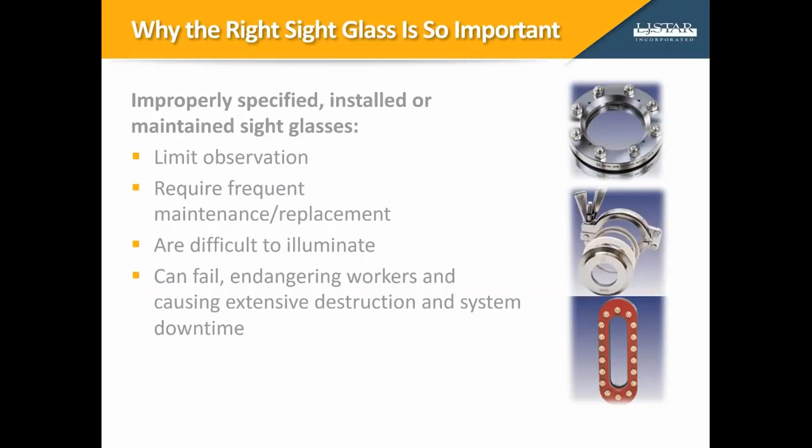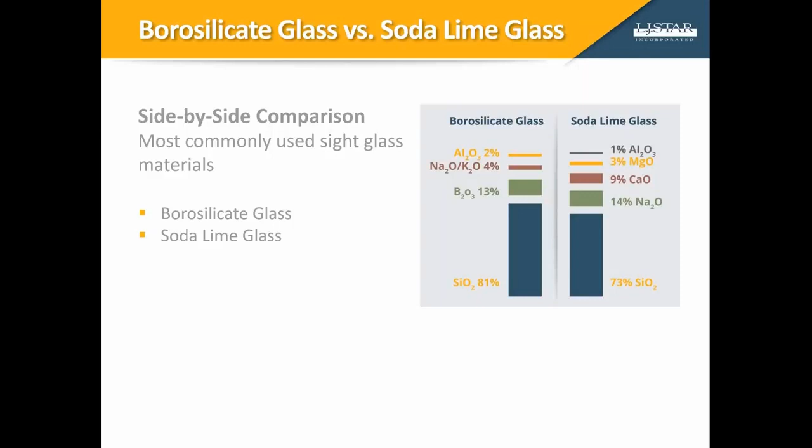Before the development of borosilicate glass, almost all sight glasses were made of soda lime glass, a common, relatively inexpensive glass which is used in bottles, light bulbs, and window panes. This glass is typically made from silica, soda, lime, magnesia, and alumina. Soda lime glass is widely used for low pressure, low temperature, and non-caustic sight glass applications.

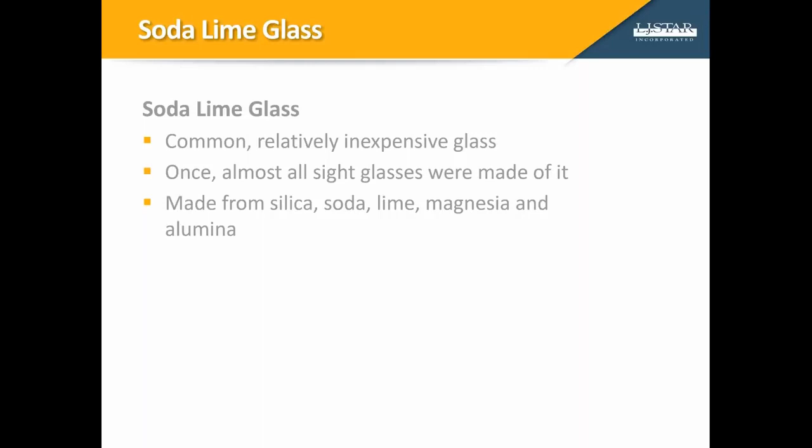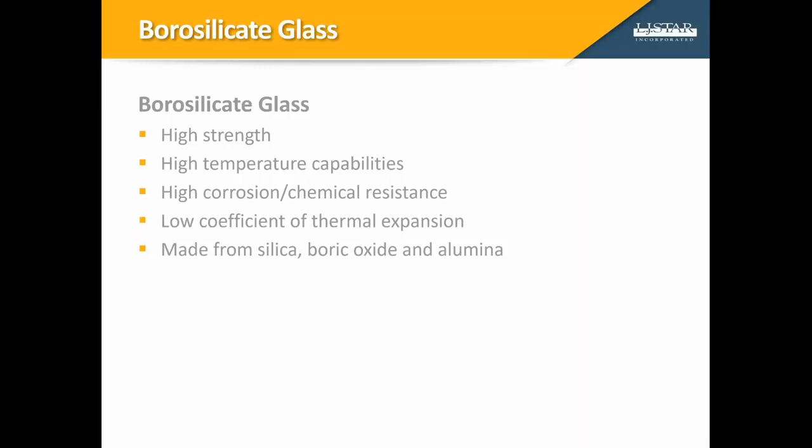Borosilicate glass, which was originally developed by Corning under the brand name Pyrex, offers high strength, the ability to withstand temperatures, high corrosion and chemical resistance, and high thermal shock resistance. In addition to sight glasses, borosilicate glass is used in cookware, lab equipment, and glass pipe. It's made from silica, boric oxide, and alumina. The boric oxide enhances its stability and helps to bind the rest of the elements together to prevent leaching.

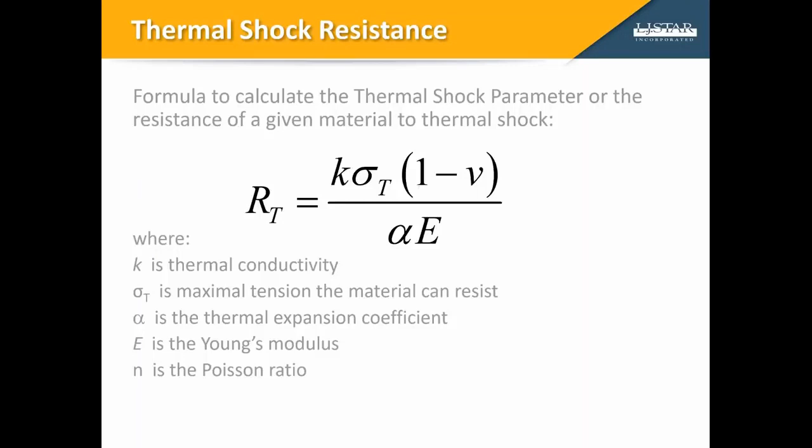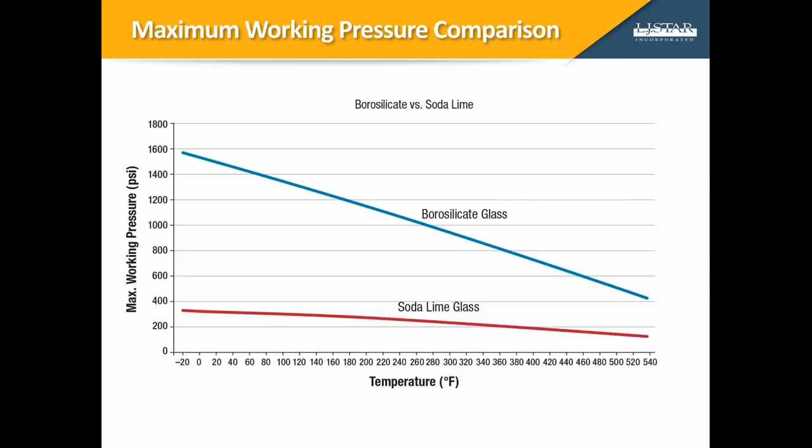The glass material selected, the unsupported diameter, and the glass thickness all play a role in determining the pressure capabilities of a sight glass assembly. This graph illustrates how borosilicate and soda lime glass perform at various working pressures and temperatures. Note the higher working pressure capabilities as the temperature increases for borosilicate glass compared to soda lime.

Borosilicate glass offers much higher chemical resistance than soda lime glass, which is important to prevent the breakdown byproducts of the glass from being introduced into the manufacturing product. Glass is not chemically inert, and even water can degrade its surface over time. Chemical degradation from caustic or acidic substances or pitting from mild abrasion can dangerously weaken glass, obscure its transparency, and create crevices where bacteria can hide or leach into the processed media.

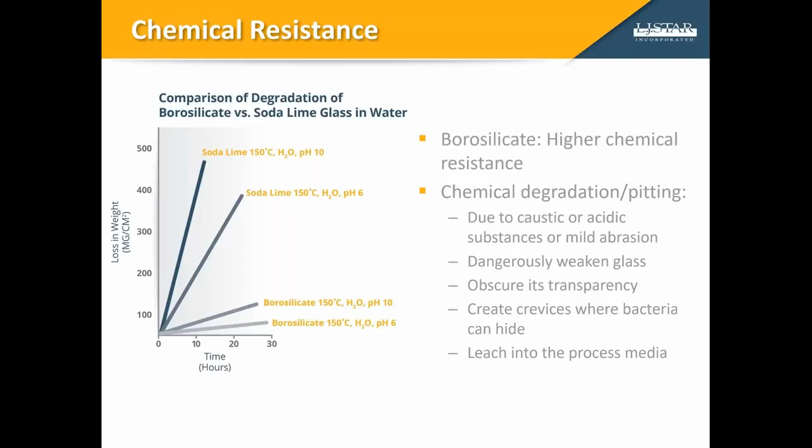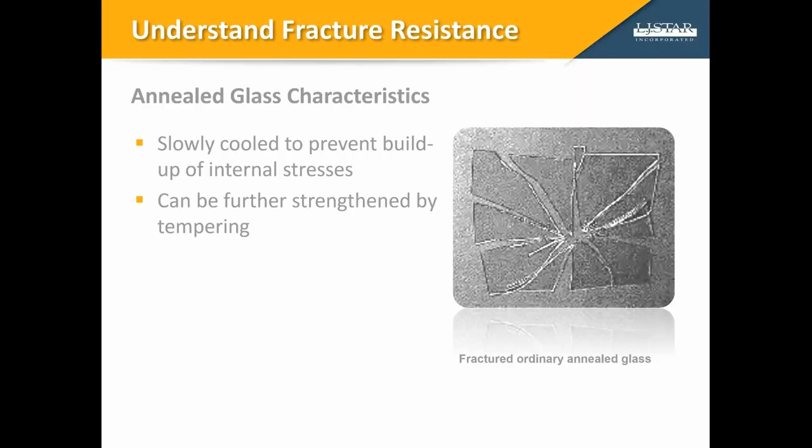Annealed glass has been slowly cooled to prevent buildup of internal stresses, so it can be cut and further processed. After annealing, the glass can be further strengthened by tempering. There are two methods to temper glass. In the first one, chemical strengthening, a chemical solution is applied to boost the mechanical resistance of the glass.

In the second method, thermal tempering, annealed glass is heated to approximately 680 degrees centigrade, almost its softening point. The glass is then quenched or cooled with a steady high-pressure flow of compressed air. This process quickly cools the surface, which goes into compression while the core is allowed to cool more slowly, which then goes into tension. This process makes heat-tempered glass 3 to 5 times as strong as annealed glass.

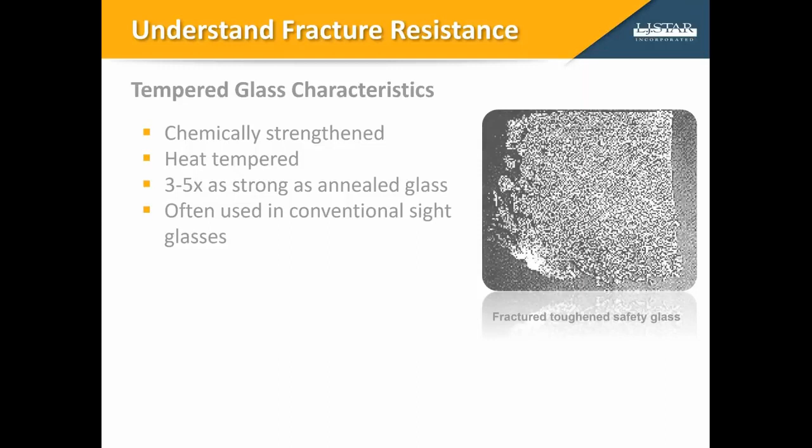Rapidly cooled, fully tempered glass, when fractured, releases the tensile energy stored in the core and breaks into many fragments, much like automotive glass and glass basketball backboards. If, instead of cooling the glass rapidly, it is allowed to cool slowly, it becomes only twice as strong as annealed glass. When fractured, these broken glass fragments are linear and will normally remain in the frame. Thermally tempered glass is often used in conventional sight glasses.

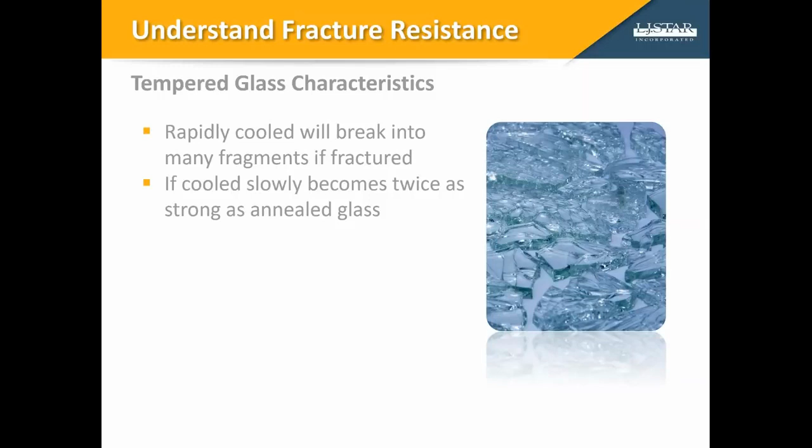In addition to tempering, glass can also be strengthened by placing it in mechanical compression. Fused glass sight glass windows, like Metaglas, offer high pressure capabilities and high safety margins. The strongest type of fused glass sight glass windows are made from duplex stainless steel and borosilicate glass. This combination creates the highest compression.

During heating, the glass is melted within the metal ring as the ring expands. The glass and the metal ring fuse together. When the unit cools, the glass hardens before the metal ring shrinks back to its original size. This process places the metal ring in tension and the glass in uniform radial compression. Glass can tolerate very high levels of compression.

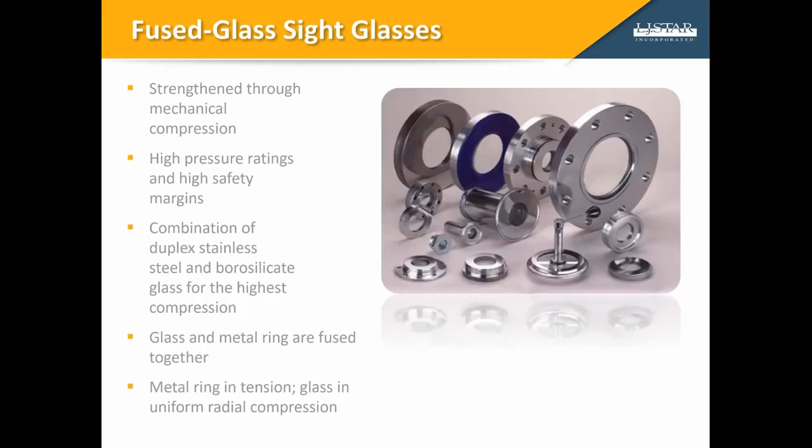Radial compression improves the performance of the glass because it offsets the effects of tensile stress. Under this strong compressive force, the glass, in effect, becomes elastic. The metal ring enhances failure resistance because mounting and sealing pressures are applied to it rather than the glass.

Even when bending forces extend beyond the metal ring into the glass, it remains elastic and able to tolerate bending. Fused glass sight glasses won't shatter even under extreme bending force. They can fail safely because they retain elasticity.

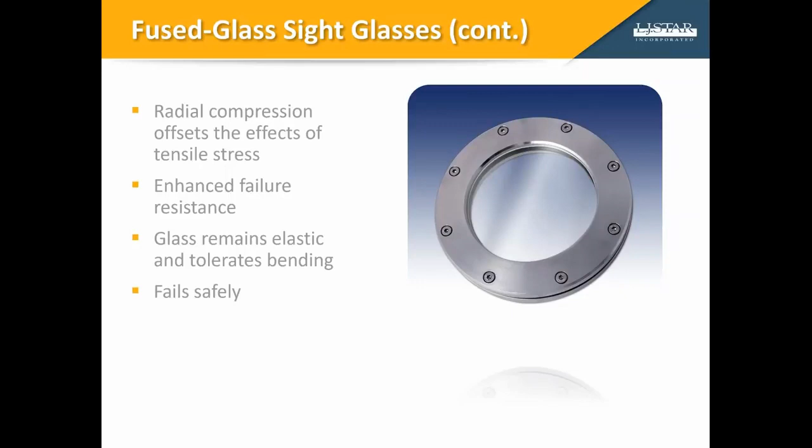Any number of factors can contribute to a sight glass failure like the one you see here. A sight glass failure can be attributed to improper assembly design, such as flanges that are too thin, too few bolts, a cushion gasket that is too soft or too thick, or inadequate glass thickness. There's also the potential for improper installation, such as over-tightening, uneven torquing, or debris trapped between the vessel and the sight glass.

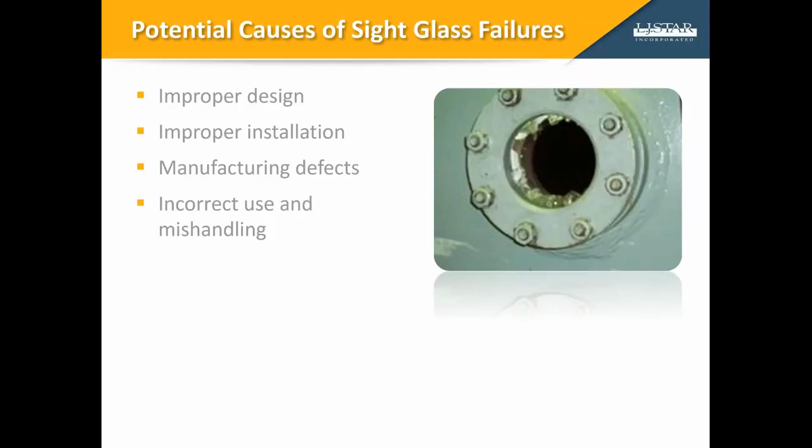Manufacturing defects, such as flanges or glass that don't have flat and parallel surfaces, can lead to failures. Incorrect use and mishandling that introduces microscopic surface defects can also require premature replacement.

Reusing commercial conventional glass discs and gaskets during maintenance and inspection can also create an unsafe situation. Both glass discs and gaskets should be replaced every time.

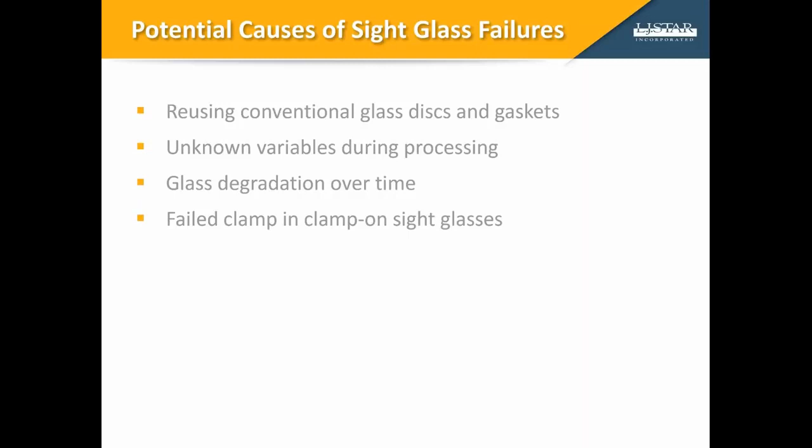Finally, for clamp-on sight glasses, which are widely used in the pharmaceutical and food production industries because they allow all components to be disassembled for easy cleaning or reconfiguration, the wrong clamp can lead to big problems. Always choose clamps designed to withstand the level of pressure the sight glass will experience.

This formula will allow us to calculate how thick your sight glass window should be based on the pressure differential it will encounter. Generally, the thicker the glass, the higher the pressure it can withstand, and the lower the resultant overall stress.

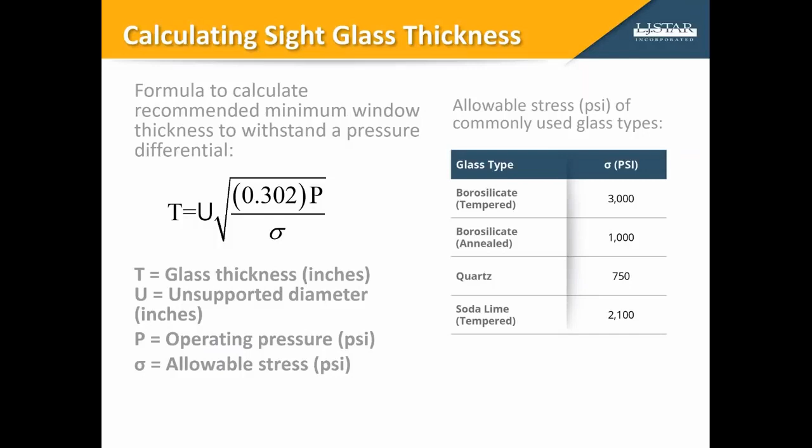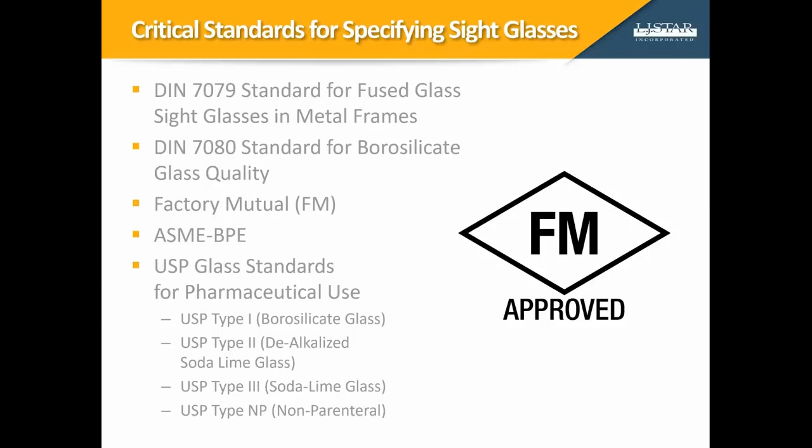Here's an overview of the technical specifications associated with the DIN 7080 spec from 2005. With this specification, there's an allowable continuous working temperature of less than 536 degrees Fahrenheit, and the maximum allowable working temperature is less than 572 degrees Fahrenheit. Keep in mind that when working temperature is greater than 536 degrees, the glass must be protected with mica film and replaced after 300 hours.

The thermal shock resistance, ISO 718, is 446 degrees Fahrenheit. Hydrolytic resistance, ISO 719, is class HGB1. Borosilicate glass has a very high hydrolytic resistance due to its composition, which contains significant amounts of boric oxide. This test classifies glass resistance to chemical attack by heating the glass in contact with water.

The acid resistance, according to ISO 1776, and the alkaline resistance, according to ISO 695, is shown in the slide, along with the linear thermal coefficient of expansion.

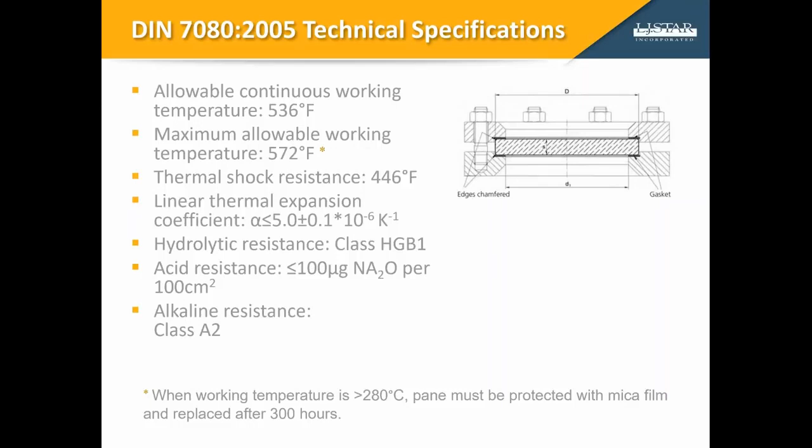The 2005 standard applies to pressure-resistant circular panes of glass made of thermally toughened borosilicate glass, which are designed to withstand a continuous one-side fluid pressure at temperature up to 536 degrees. The standard does not apply restrictions to the use of borosilicate glass panes below ambient temperatures.

To meet the DIN 7080 standard, the glass must meet the hydrolytic resistance requirements, which means it must have the appropriate proportion of boric oxide. This should measure between 8% and 13%.

Boron trioxide performs a primary function as a binder that holds the silica sand, soda, and ground lime. This is known as the recipe for borosilicate glass throughout the chemical and pharmaceutical processing industries.

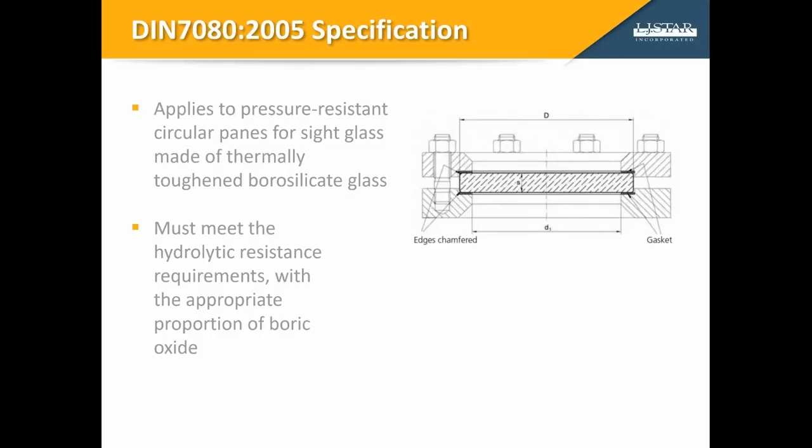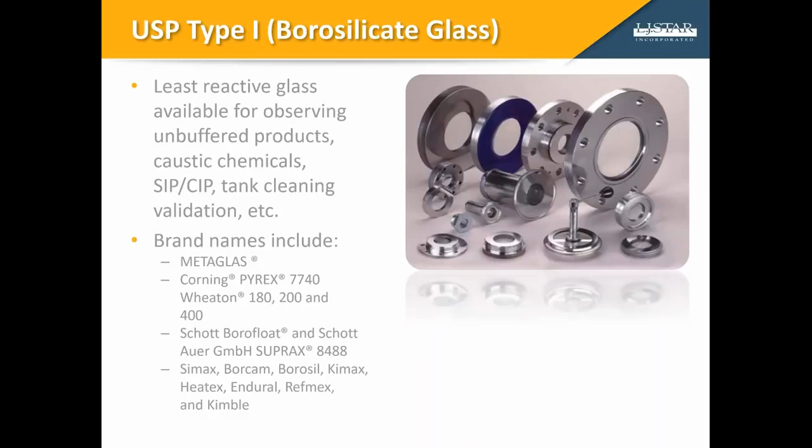Borosilicate glass is the least reactive glass for sight glasses for observing unbuffered products, caustic chemicals, SIP, CIP processes, tank cleaning validations, and more. Metaglas is the best known of the Type 1 sight glass brand names.

Take care when selecting glass for applications where the pH is very low or very high, because even Type 1 glass can be subject to attack under certain conditions. Although Type 1 borosilicate glass has the least pH shift of any glass, there still may be some sensitivity with certain packaged products. Surface treatment is not usually required.

However, such treatments can further enhance the desirable characteristics of an already superior material.

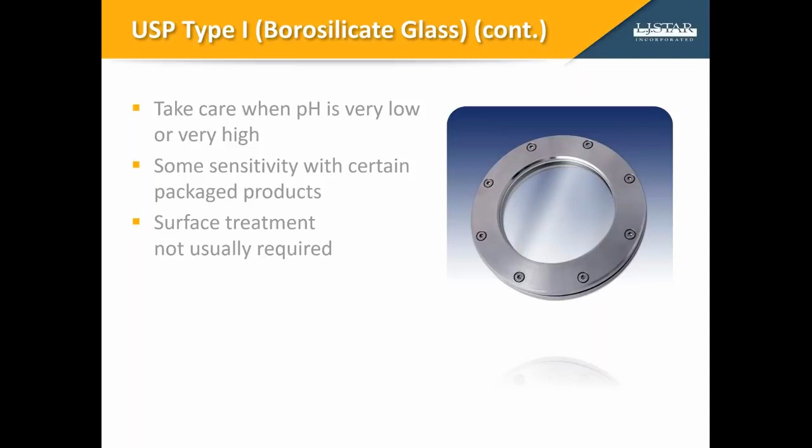USP Type 2 dealkalized soda lime glass has higher levels of sodium hydroxide and calcium oxide than Type 1, and is also less resistant to leaching than Type 1, but more resistant than Type 3. It can be used for products that remain below pH 7 for their shelf lives. The most common applications for this glass are containers for alcoholic spirits. Dealkalizing treats the inside surface, so there is less extractable alkali.

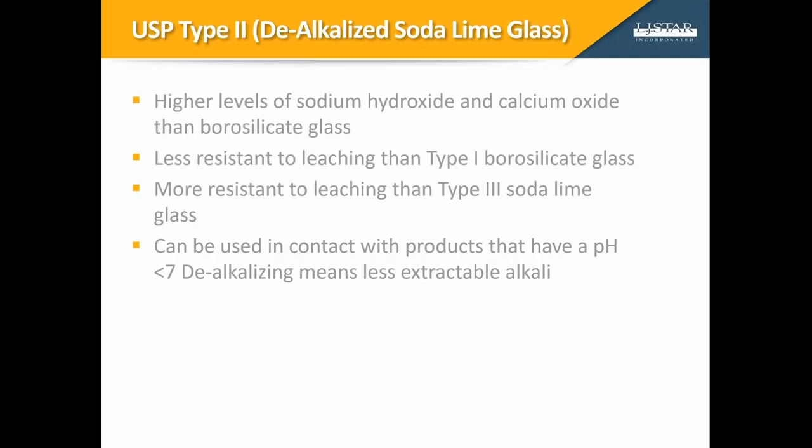USP Type 3 soda lime glass is generally not used in sight glasses, but is acceptable in packaging some dry powders that are subsequently dissolved to make solutions or buffers. Type 3 glass is also suitable for packaging liquid formulations that prove to be insensitive to alkali, but shouldn't be used for products that are to be autoclaved.

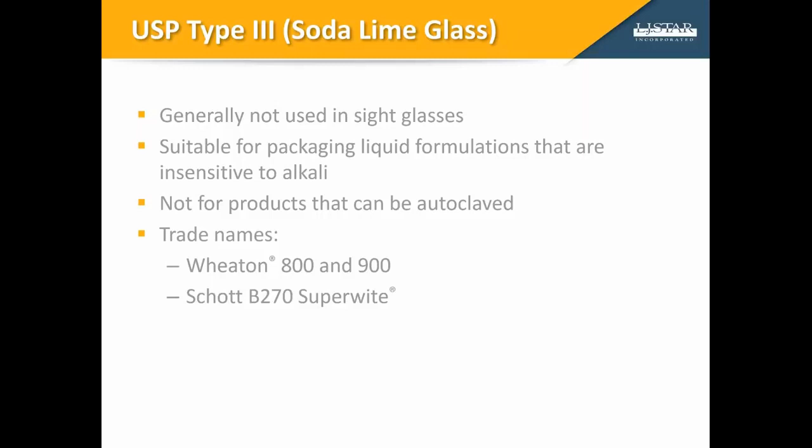Trade names include Wheaton 800, 900, and Schott B270 Superwite. The introduction of B270 Superwite made it much more difficult to identify soda lime glass. Prior to this, soda lime was easily identified by its green hue. The Superwite formulation made it much easier for cheaper knockoff brands to be passed off as the more superior borosilicate material.

USP Type NP soda lime glass is general purpose glass used only for non-injectable drugs. These are applications where chemical durability and thermal shock are not factors, but it has the greatest risk of etching and leaching in process environments. Soda lime glass does not include the measurable levels of boric oxide needed to maintain stable glass, which can lead to the leaching and extraction of core elements into the process. It's the least capable of effectively dealing with CIP and SIP requirements in pharmaceutical applications. Trade names for this type of glass are Wheaton 810, 910, and Boro Plus.

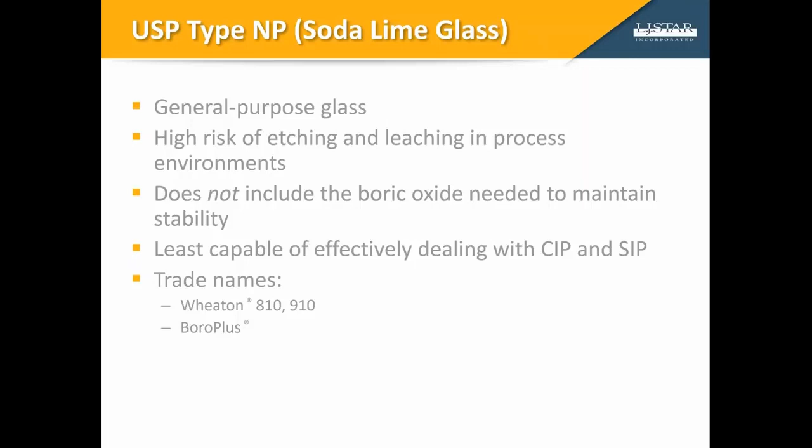Make sure you don't spend all your time looking through the window. Also spend some time looking at them.

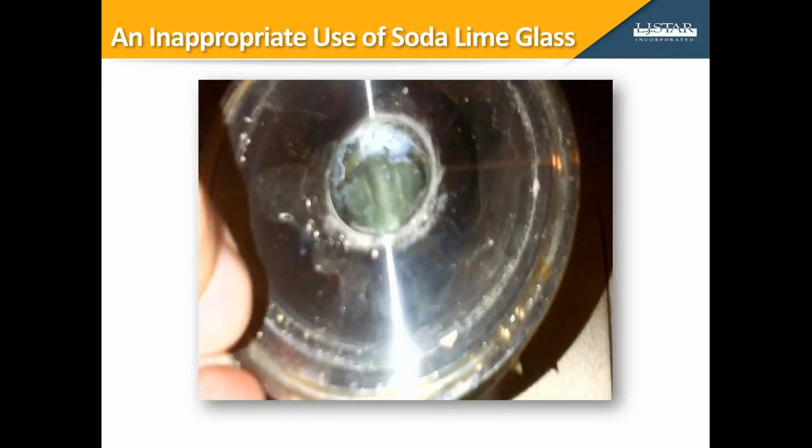We have several sight glass maintenance tips to share based on our many years of industry experience. For example, once a conventional sight glass has been removed from its mounting for any reason, discard the glass and gaskets and replace them with new glass and gaskets. The exception to this rule is Metaglas. These safety windows may be installed with new gaskets following the instructions provided for this procedure. Other tips include making sure you keep glass clean using commercial glass cleaners, never using wire brushes, metal scrapers, or harsh abrasives, and not attempting to clean glass while equipment is in operation.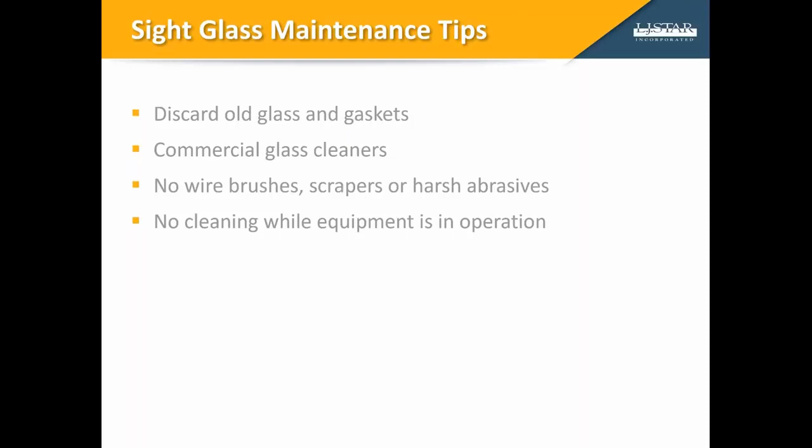To examine the glass for scratches, shine a bright concentrated light source at an angle of about 45 degrees. Anything that has a glint should be inspected closely and could be a cause for replacement, including scratches that catch the fingernail or any star or crescent-shaped marks that glisten. Sight glasses that appear cloudy or roughened after cleaning should be replaced. Finally, always inspect sight glass frames or flanges for corrosion or buildup.

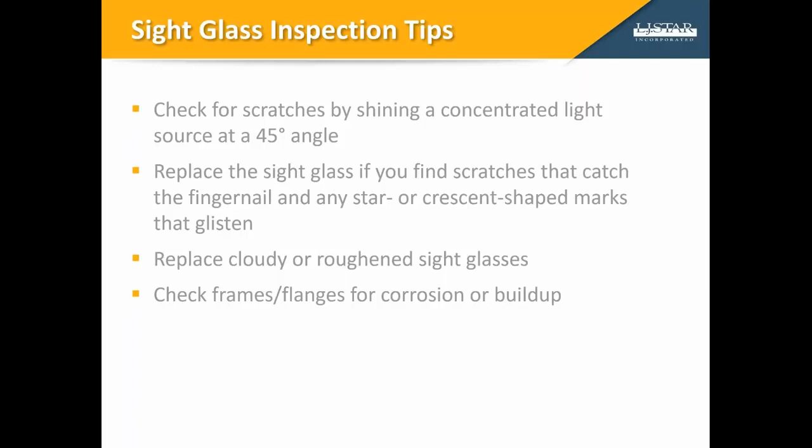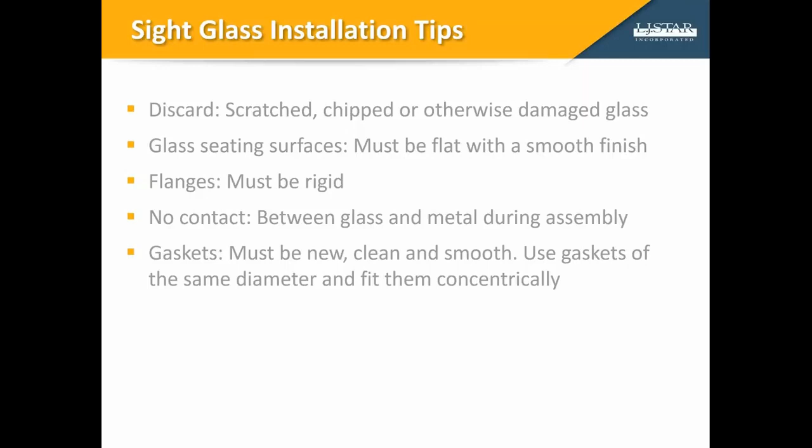Remember to never tighten bolts on a sight glass while equipment is in operation or when the sight glass is hot. Follow a regular tightening sequence to ensure even loading of glass. Allow a maximum difference of 1.5 foot-pounds between bolts during tightening, and tighten only enough to produce a positive seal against the process pressure. Bolts may need to be tightened after initial cycling of the vessel.